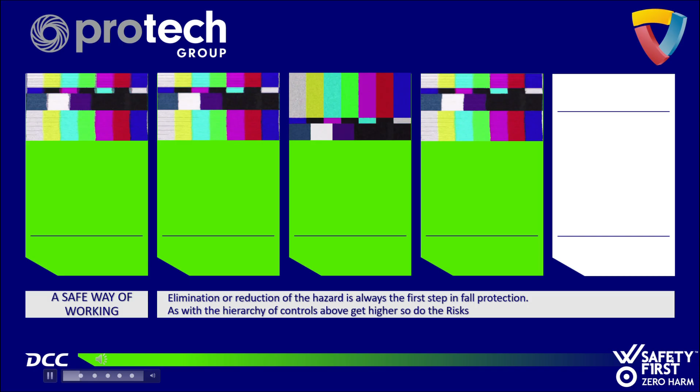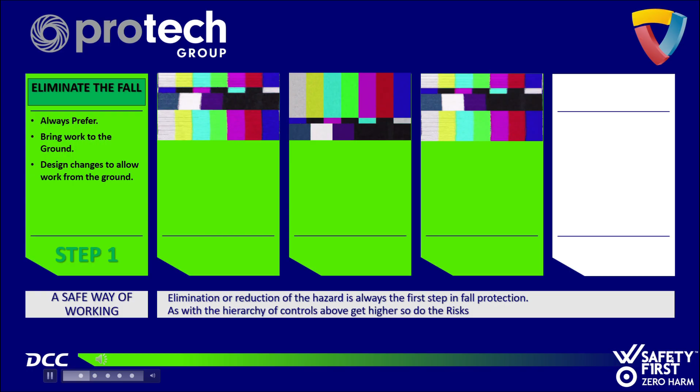Today, we're focusing on working at height and the fall protection hierarchy, which sets out the safest way to plan any work at height. The key message is simple. As you move down the hierarchy, the risk increases, so we must always start at the top and only move to the next level if there is no safer option. 1. Eliminate the fall. Our first priority is to remove the need to work at height altogether. That means bringing the task to ground level or redesigning the job so no one is exposed to a fall. If we can eliminate the hazard, we do it.

2. Passive fall restraint. If elimination isn't possible, we use built-in physical protection like guardrails, parapets, or fixed barriers. These controls don't rely on the worker doing anything. The protection is always there. 3. Active fall restraint. Next is preventing someone from reaching the fall hazard using a harness and restraint lanyard. This requires trained, authorized personnel and a written rescue plan in place before work starts.

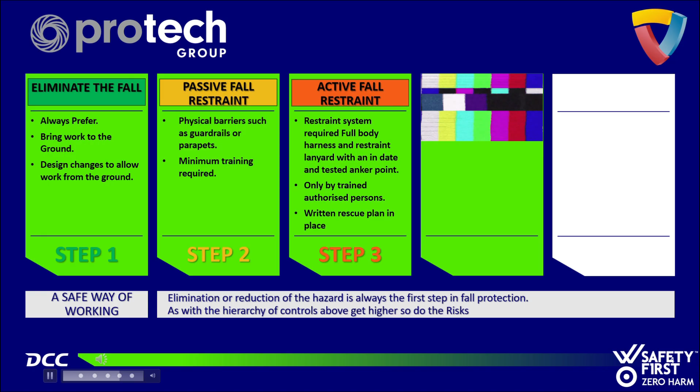4. Fall arrest. This is the last resort. Fall arrest doesn't stop the fall, it stops you after you've fallen. It requires full training, correct equipment, regular inspection, and a robust rescue plan. Stop. No work without controls. If the correct level of protection isn't in place, work does not start. We follow the hierarchy in order: eliminate, passive, active, arrest.

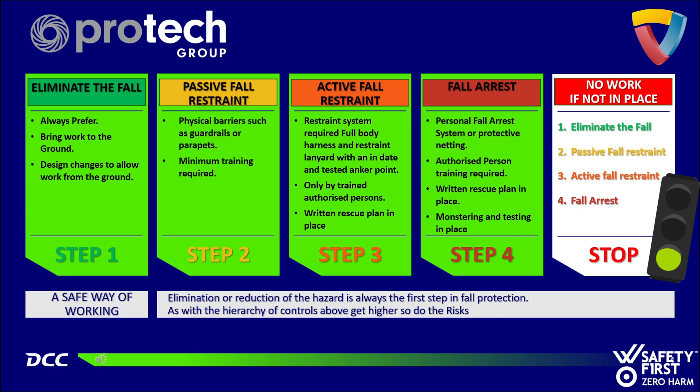This will be broken down into 3 sections. Firstly, using the right equipment for the job. Secondly, checking our surroundings before we start. And finally, speaking up when something doesn't look right. Using the right equipment for the job: ladder and access equipment safety.

Before we start, I want to remind everyone that before using any access equipment, you must complete a pre-use inspection in the Safety Culture app and mark up the inspection tag. If it's not inspected, it's not used. If it's defective, it's taken out of service immediately, quarantined, and reported. Hierarchy of access equipment. We follow a strict hierarchy of equipment. Each item has a specific purpose, and it must only be used for that purpose.

No exceptions. Single-step hop-up. The first item is the single-step hop-up. This is for single-point, short-duration work only. It must not exceed 1 meter in width, and it is not a working platform. You work exactly where you stand. When you move your feet, you move your balance point, so you must stay alert to your footing at all times. If your task requires you to move around an appliance, or if your work footprint is wider than 1 meter, then this is not the correct access tool. In that case, you must select a platform with proper handrail protection.

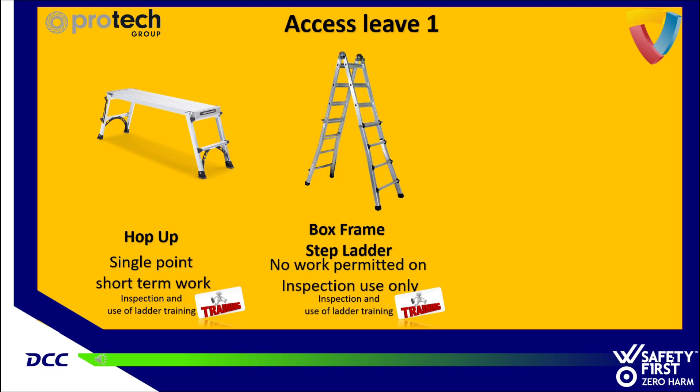Box frame ladder. The box frame ladder. This ladder is for access and inspection only. No work is permitted from a box frame ladder, not even small tasks. You maintain 3 points of contact at all times, and you only use it to reach a safe working platform. If work needs to be carried out at height, you must choose a safer, more stable option.

Flat step ladder. The flat step ladder. This is for short duration, light task work. You must keep 3 points of contact at all times, and you must not use power tools on this ladder. This is for quick, simple tasks only. If the job requires both hands, repetitive work, or anything more involved, then you need to move up to a podium or another protected platform.

Remember, to summarize: inspect before use, tag before use, and only use each piece of equipment for its intended purpose. If the task doesn't fit the equipment, choose safer equipment. Don't try to make it fit. Look at the next slide and the next level of access equipment.

Safe use of platform steps, podiums, and self-build towers. Before we begin, I want to reinforce one rule that applies to all access equipment. Before using anything, steps, podiums, or towers, you must complete a pre-use inspection in the Safety Culture app and mark up the inspection tag. If it's not inspected, it's not used. If it's defective, it's taken out of service immediately, quarantined, and reported.

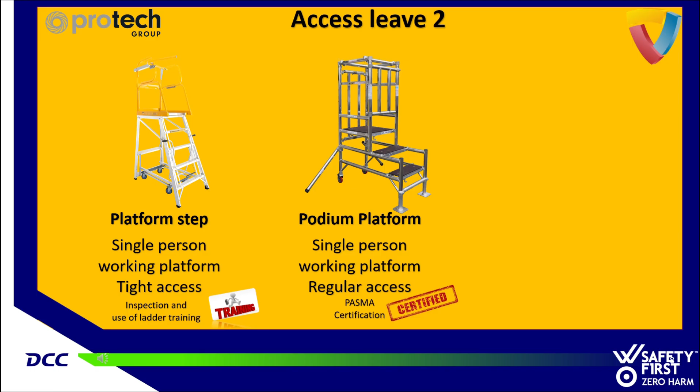Podiums must be inspected and tagged using an inspection tag system. Users must be trained in the safe use of podiums. Podiums are a safer alternative to steps because they provide collective fall protection. Self-build tower scaffolding. Finally, we have self-build tower scaffolding. These towers provide a large, stable, fully guarded platform for longer duration or higher risk tasks. They are the preferred option when stability, reach, or task duration increases.

Safe use requirements. Towers must be erected using the 3T method or the AGR method, following the manufacturer's guidance. Only personnel with PASMA certification may erect, modify, or dismantle towers. Towers must be level, braced, locked, and fitted with internal access ladders. Never move a tower with people or materials on the platform. Towers must be inspected and tagged using a Scafftag system. Inspection requirements include after assembly, after any modification, every 7 days, and after adverse weather. Self-build towers are the preferred option when the task requires stability, duration, or significant reach.

Conclusion: choose the right equipment for the task. Inspect it, tag it, and use it only within its designed limits. If the task demands more stability or protection, move up the hierarchy, which you can find on the next slide. Don't take shortcuts.

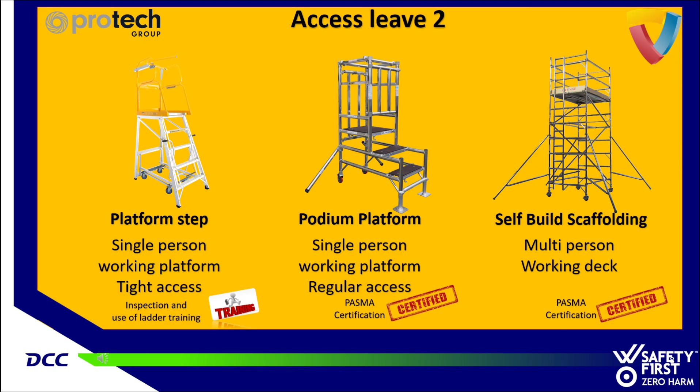Before we bring any MEWP onto site, we need to make sure we're choosing the right machine for the job and the conditions we're working in. A poor choice creates avoidable risks. So here are the key points we check every time.

First, look at the task requirements. What height do we actually need to reach, and do we need to get up and over anything? Think about horizontal outreach, especially if we're working over machinery, voids, or plant. Make sure the platform can safely take the combined weight of people, tools, and materials. And remember, different tasks need different machines. Maintenance, installation, facade work, or tight internal access all drive different choices.

Next, assess the site and ground conditions. Check the ground bearing capacity. Soft ground, backfilled trenches, or hidden surfaces might mean we need spreader plates or a different MEWP altogether. Match the machine to the terrain. Rough terrain units for uneven ground, slab machines for smooth floors. And don't forget weather. Wind, rain, ice, and poor visibility all affect safe operation. Space matters too. Narrow aisles or low ceilings may push us toward compact scissors or vertical masts.

Then consider access and maneuverability. Can the machine physically get to the work area? Check door widths, ramps, gradients, and turning circles. Look for overhead obstructions like pipework or steelwork. These often dictate whether we need a boom rather than a scissor. Also think about setup space. Outriggers, stabilizers, and turning radius all need room.

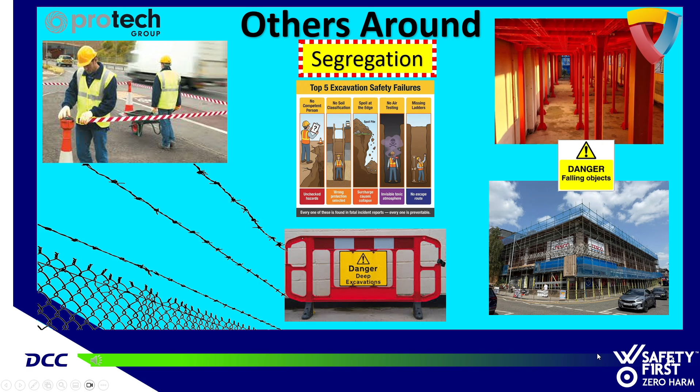Edge protection requirements when working at height. On this slide, we're focusing on one of the most critical areas of safety: edge protection. Whether we're working on a roof, near an excavation, or on any elevated surface, the principle is simple. If someone can fall, we must prevent that fall.

Edge protection is our first line of defense. It stops people falling, it stops materials falling, and it creates a predictable, controlled working environment. So let's walk through what good edge protection looks like and how we apply it in different situations. First, let's talk about what compliant edge protection actually is.

A safe system must prevent a person from falling, prevent tools or materials from dropping, and be strong enough to withstand foreseeable loads. It must be installed by competent people and inspected regularly.

A standard guardrail system includes 3 key components: a top rail at a minimum height of 950 millimeters, like what is found on scaffolding and access equipment, an intermediate rail so no gap exceeds 470 millimeters, and a toe board at least 150 millimeters high. These 3 elements work together to protect both people and materials.

Now let's move to excavations. Even though the work is at ground level, an excavation is legally classed as a fall from height risk. Anyone can fall in: workers, plant operators, or members of the public. So we treat the edge exactly the same as any elevated platform. That means physical barriers, clear segregation, and preventing unauthorized access.

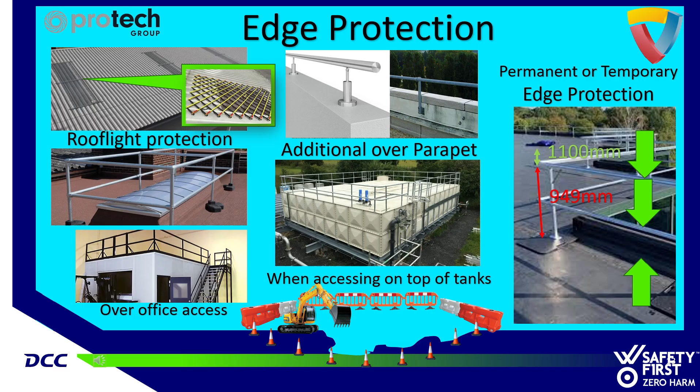Safe ground conditions for MEWPs and access equipment. Before we position or operate any access equipment, especially mobile MEWPs, we must make sure the ground conditions are safe. Most MEWP incidents don't happen because the machine fails. They happen because the ground underneath it wasn't suitable. So ground assessment is not optional. It's a critical part of safe setup.

Why do ground conditions matter? MEWPs and access platforms put a lot of weight through a small footprint. If the ground can't support that load, the machine can sink, tilt, or overturn. So we always assess the ground before we move, while we maneuver, and after we position the equipment.

Key ground checks before moving any access equipment. When you're maneuvering a mobile platform or any mobile access equipment into position, check the following. The surface must be firm, level, and load-bearing. Avoid soft ground, mud, backfilled trenches, or recently disturbed soil. Look for slopes, cambers, potholes, and uneven surfaces.

Identify drains, manhole covers, ducts, voids, or fragile surfaces. These may collapse under load. Watch for wet, icy, or slippery surfaces that could cause wheels or outriggers to slide. Ensure the route is clear of debris, waste, hoses, and loose materials. If the ground isn't suitable, stop and choose a safer location, or put controls in place.

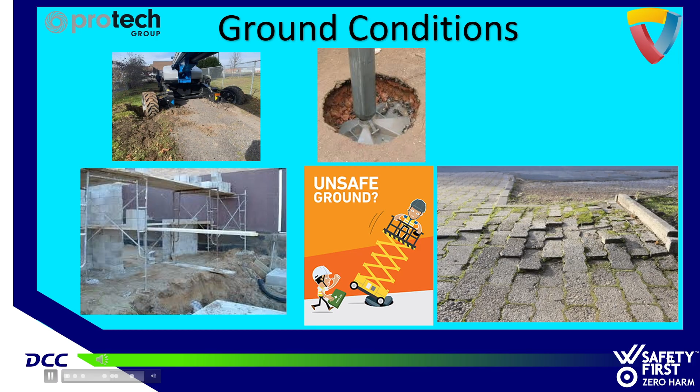Remember, a mobile platform is only as stable as the surface it's rolling on. Setting up mobile platforms on final ground position. Once you've moved the mobile platforms into place, recheck the ground. Even small changes matter. Deploy outriggers or stabilizers fully if fitted. Use spreader pads under outriggers, never bricks, timber scraps, or makeshift packing.

Ensure the machine sits square and level. No rocking or movement. Check for underground surfaces that could collapse under point load. Keep clear of edges, excavations, embankments, and retaining walls. If you cannot make the mobile platform stable, you cannot use it.

Different terrain types and choosing the right MEWP. Different ground types require different MEWPs. Hard, level concrete slab: scissor lifts or electric booms. Rough, uneven ground: rough terrain booms or scissors with four-wheel drive. Soft or unstable ground: tracked mobile platforms or spider lifts with wide load distribution. Confined or sensitive areas: lightweight tracked units or vertical masts. Choosing the wrong machine for the terrain is one of the biggest causes of instability.

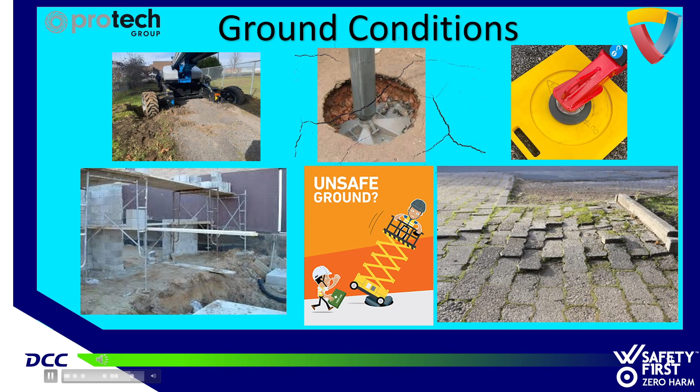Weather and environmental factors. Ground conditions can change quickly. Rain can turn firm soil into soft ground. Frost can hide instability. Heat can soften tarmac. Heavy plant nearby can cause vibration or ground movement. If conditions change, stop and reassess before continuing.

Conclusion. To summarize, any access equipment is only safe when the ground beneath it is safe. Check the surface before you move it, while you move it, and after you position it. If the ground isn't firm, level, and capable of supporting the load, then the equipment isn't safe to use. We don't take chances with stability.

Overhead risks when working at height. Before we start any work at height, we need to look not just below us, but above us. Overhead hazards are one of the most serious risks on any site, and they're often the ones people forget to check. A moment of inattention can put you, your team, and the public in danger.

Overhead power lines. One of the biggest risks is overhead power lines. Electricity can arc. It doesn't need direct contact. If a MEWP, scaffold, pole, or even a long tool gets too close, the result can be fatal. So we must maintain the required minimum clearance distances at all times.

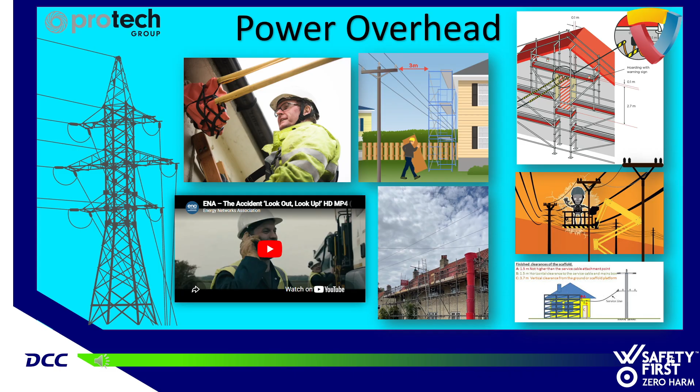Follow the look-out principle before raising any platform. Never assume lines are insulated. Treat every overhead line as live and lethal. Stop work immediately if you're unsure of the voltage or safe distance. If there's any doubt, we get the area assessed and controlled before work continues.

MEWP-specific overhead risks. MEWPs introduce additional overhead hazards because the platform moves vertically and horizontally. Key risks include entrapment between the platform and overhead structures, boom swing into obstacles, unexpected movement when the ground shifts, and restricted visibility when elevating. Before raising a MEWP, we must do a full 360-degree check around and above the machine.

Use a banksman when visibility is limited. Move slowly and deliberately. Never elevate under power lines or low structures unless the area is controlled and authorized. Materials and tools overhead. It's not just the equipment, it's what we carry. Long materials like conduit, pipe, timber, or metal sections can bridge into power lines, strike overhead structures, knock into other workers, or shift the center of balance on a platform. We must always plan the lift, the route, and the clearance before raising materials.

Scaffolding and clearance requirements. When erecting or working from scaffolding, we must maintain safe horizontal and vertical clearances from overhead lines. Only trained and competent scaffolders should work near electrical hazards. No metal components should be handled within unsafe distances. Finished scaffolds must be checked to ensure they do not breach clearance zones. If the scaffold is too close, it must be redesigned. We never compromise on electrical safety.

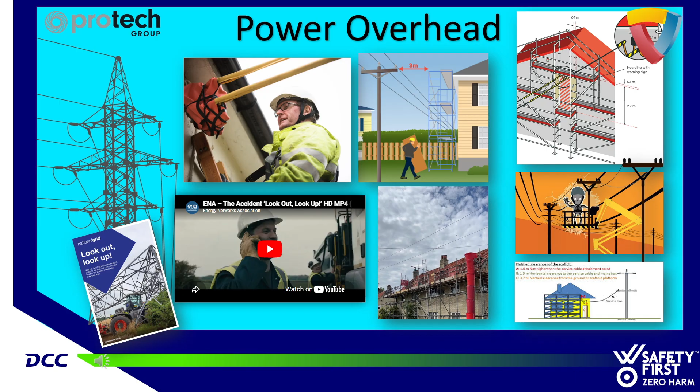People get away with it. They forget the rules, but there's no danger just then. Or they don't look out, but someone else is vigilant. It's when two things coincide that things go wrong. When the danger's there, but goes unnoticed.